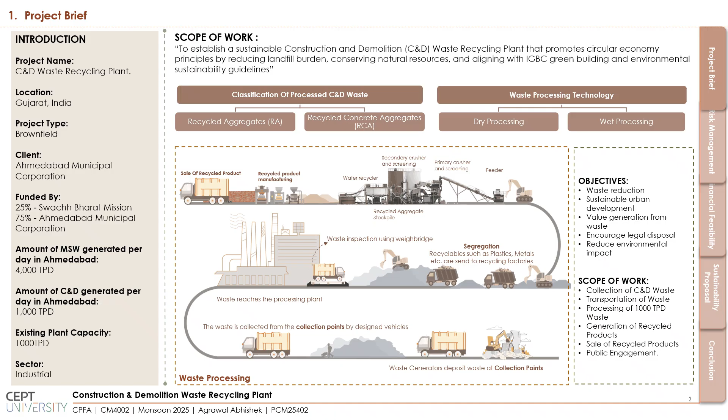The project is located in Ahmedabad, Gujarat and categorized as a brownfield intervention within the industrial sector. The objectives of the project include waste reduction, value generation, sustainable urban development, encouraging legal disposal, and reducing the environmental impacts. The broader scope of the project includes the collection, transportation, processing of 1,000 TPD waste and public engagement.

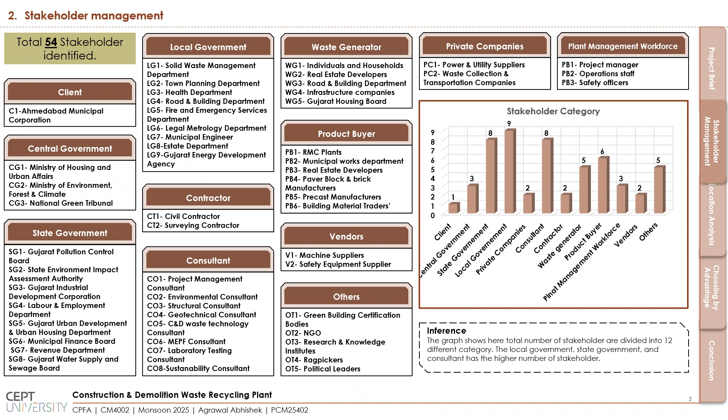So now coming up to stakeholder management. Stakeholder management helps us to identify all stakeholders, understand who is involved and classify them so that their roles can be managed effectively throughout the project. We have identified a total of 54 stakeholders, which we have categorized into 12 different categories. The categories are client, central government, state government, local government, contractor, consultant, waste generator, product buyer, vendors, private companies, plant management workforce, and other stakeholders. The bars here highlight that local government, state government, and consultants form the largest stakeholder categories, indicating that these groups have the strongest involvement in project approval and regulation operations.

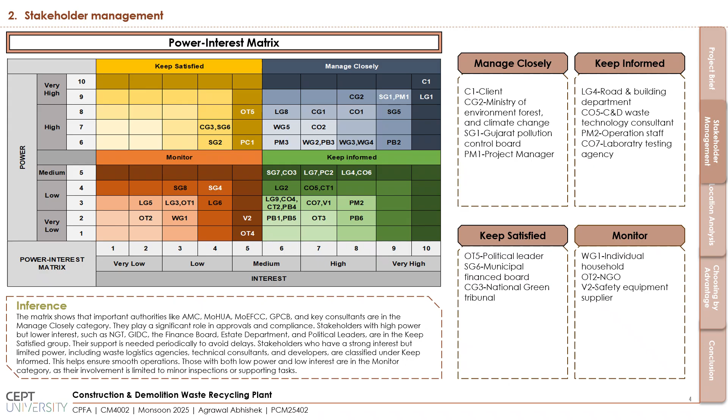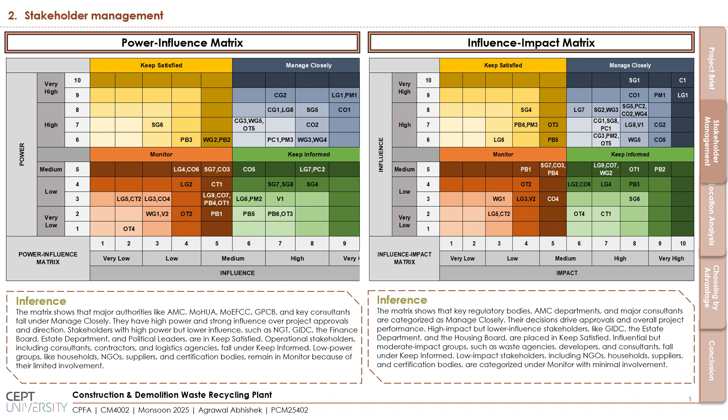In the influence impact matrix, the manage closely category includes AMC, consultants, and the pollution authorities, because their approvals and decisions directly shape the project progress. High impact but lower influence groups such as the estate department fall under keep satisfied. Operational agencies and the developers fall under the keep informed group. Low impact and low influence groups like NGOs and households remain in the monitor section. The stakeholder management tells us how the regulatory bodies and the major consultants have a central role in shaping the project decisions, and they must be prioritized for coordination.

So now coming up to location analysis. Location analysis helps us to identify the most suitable city and land parcel for establishing the C&D waste recycling plant based strictly on scoring and feasibility. We have conducted a detailed assessment based on macro and micro parameters to ensure the chosen site meets the environmental, regulatory and operational criteria.

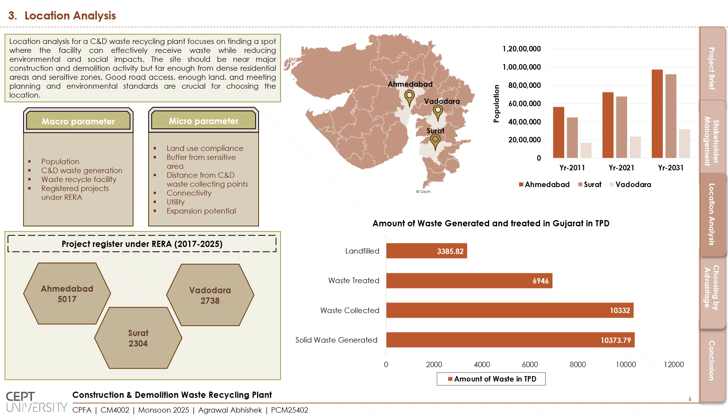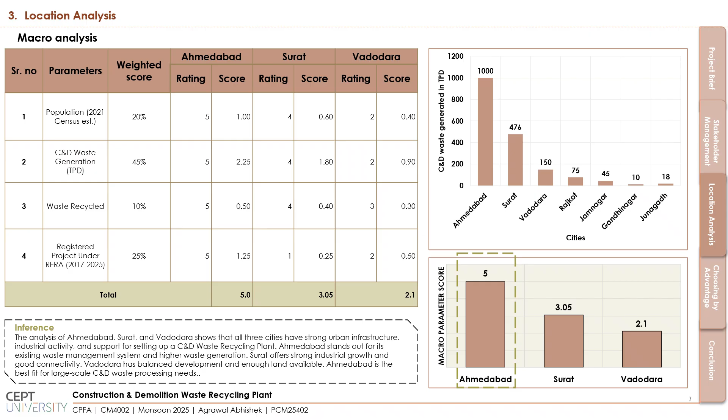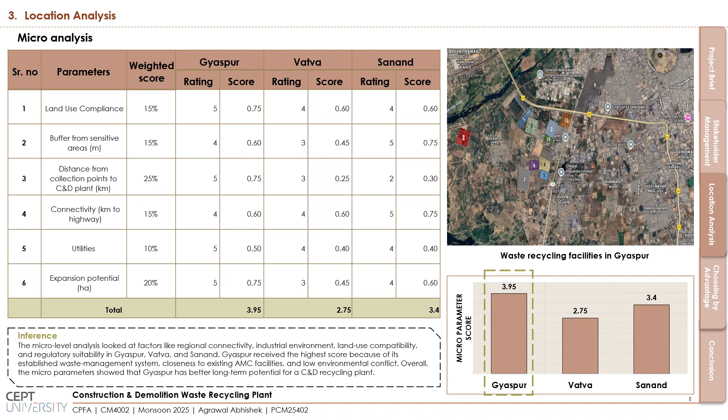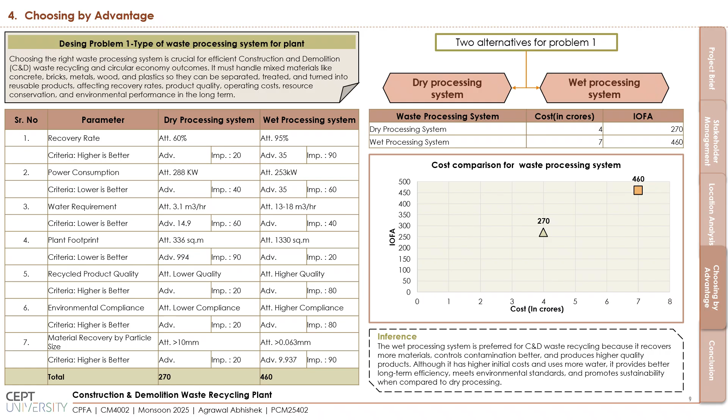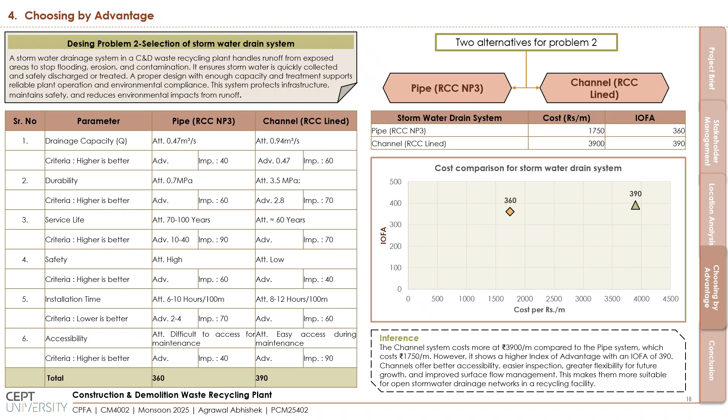The pipe system scores 360 IOFA, while the channel system scores 390 IOFA. Even though the channel system costs more, it offers better accessibility for maintenance, easier inspection, and flexibility for future growth. It also improves surface flow management.

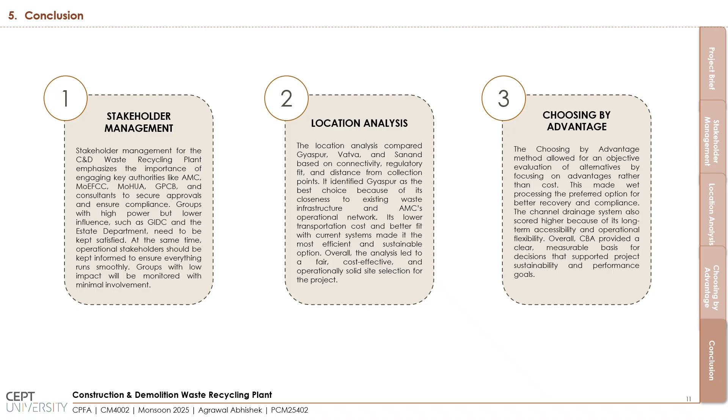For choosing by advantage, the method allowed for objective evaluation of the alternatives by focusing on the advantages rather than the cost. This made the wet processing system the preferred option for better recovery and compliance. The channel drainage system also scored higher because of its long-term accessibility and operational flexibility. Overall, CBA provides a clear, measurable basis for decisions that support project sustainability and performance goals.